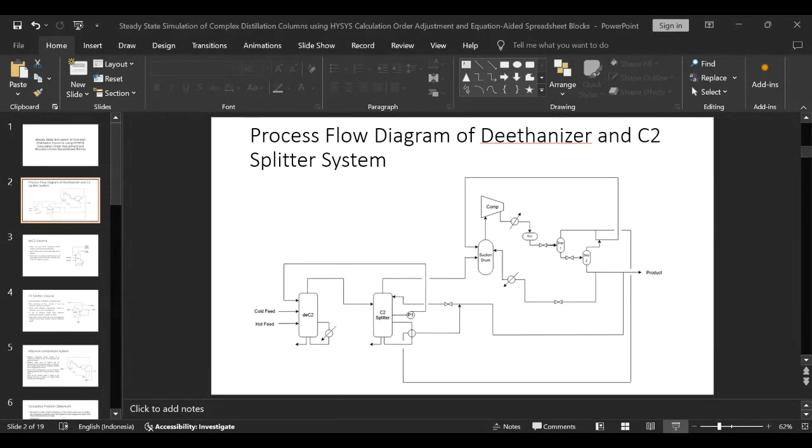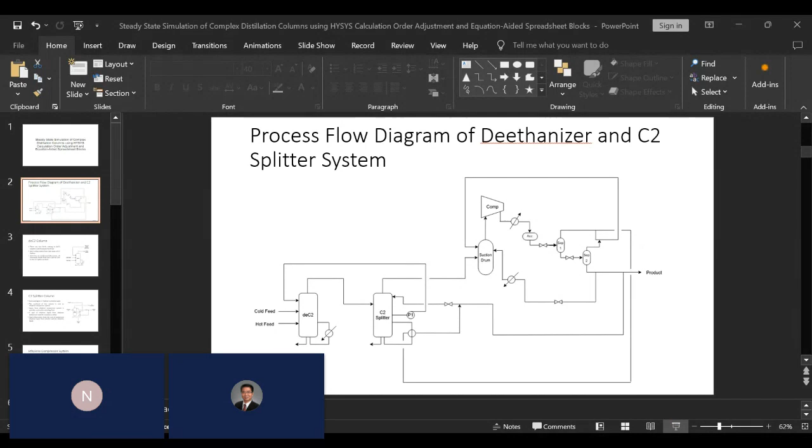Sorry, Novian, I'm not sure whether you're sharing. I can see only the title slide still. Okay, now I can see. Then you can put it full screen, I think it's better. Okay, perfect. Wait, if I move to the next slide, can you see any difference? I see the process flow diagram now. And how about now? Still the same. Maybe you're projecting? Now I can see the column, the deethanizer column.

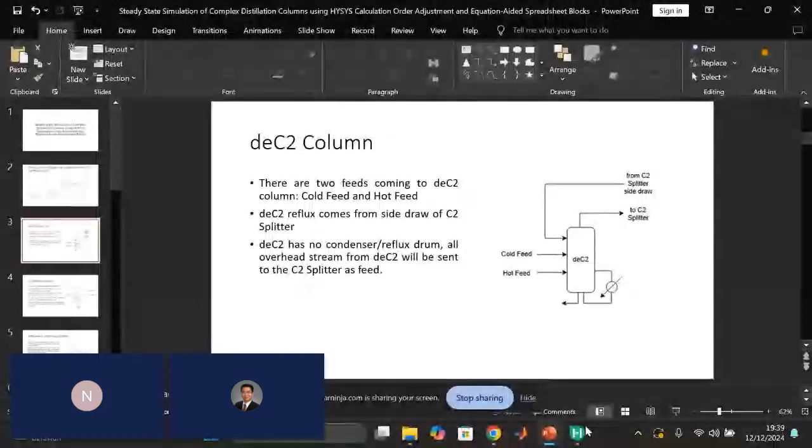Okay. Right. So maybe I will share an entire screen. I think it's a lot safer. Okay, how about now? Yes. Yeah, this is perfect. Okay.

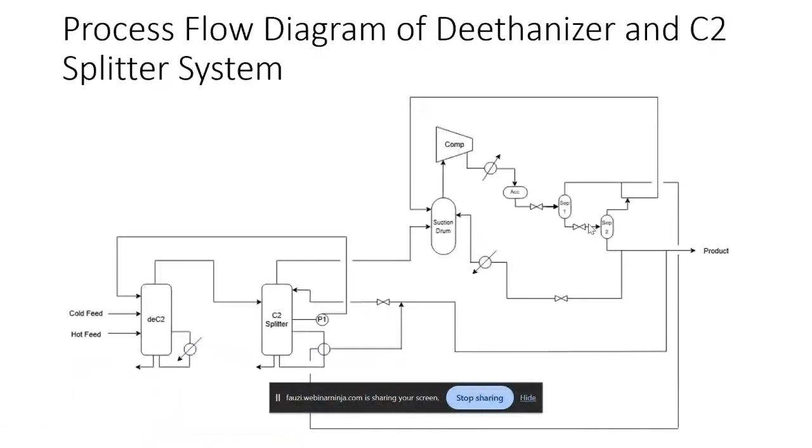So for the ethylene refrigeration system, we have the usual stuff that we might have in a refrigeration system. So we have suction drum, compressor, and then the condenser, accumulator to store the condensed liquid, and then we have multiple expansion valves to gain lower temperature. And I will describe each of the equipment in greater detail using next slides.

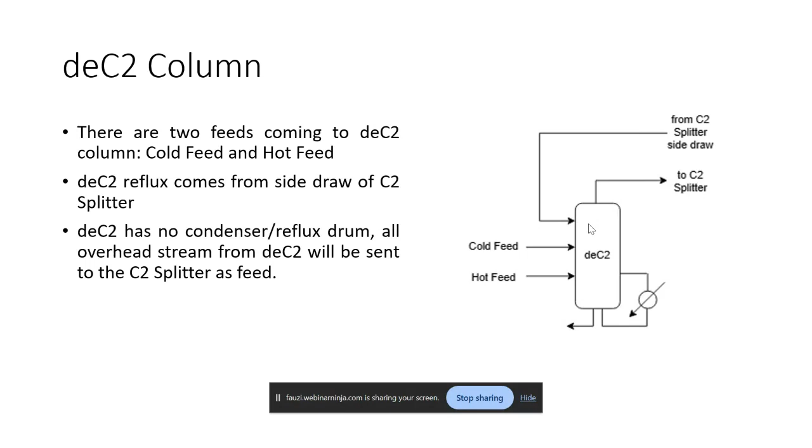So we have the deethanizer column. For this column, we have two feeds coming in: cold feed and hot feed. And the name really suggests the temperature, so cold feed has lower temperature than hot feed. For the reflux, the deethanizer reflux comes from the side draw of the C2 splitter. Because of this, the deethanizer has no condenser or reflux drum. All of the overhead stream from the deethanizer will be sent to the C2 splitter as feed.

And then we have the C2 splitter column. Feed coming to this column is entirely vapor because it's basically the overhead of the deethanizer. And the overhead of this column is sent to the ethylene compressor system. So when the overhead is finished being separated in the C2 splitter, it will be directly sent to the compressor. And vapor from the ethylene compressor system is partially used as the reboiling fluid.

Now, this is one of my favorite parts of this system because it has very nice heat integration; nothing goes to waste. The ethylene vapor that still contains transferable heat is used as a reboiling fluid for the C2 splitter, so it doesn't rely on external heat supply such as steam. And a part of the ethylene liquid from the ethylene compressor system is used as reflux. This stream will be joined together with condensed ethylene from the reboiler, and together they become the true reflux for the C2 splitter.

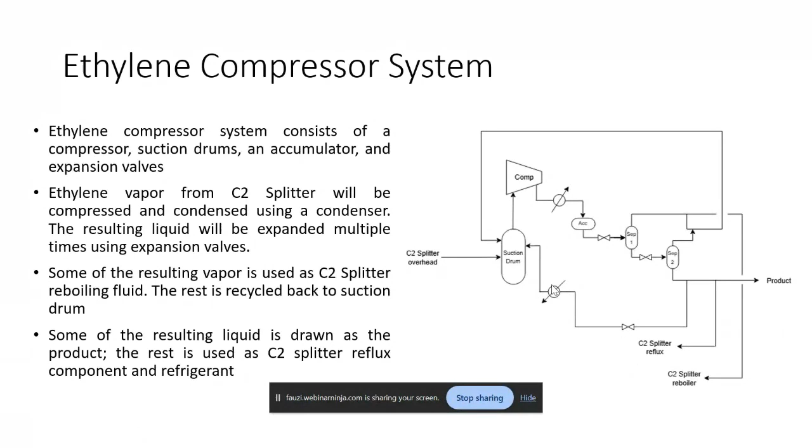Novian, can you? Yes. Sorry to interrupt. Can you click hide on the black box? Oh, yeah. Okay. Sorry. Yeah, thank you.

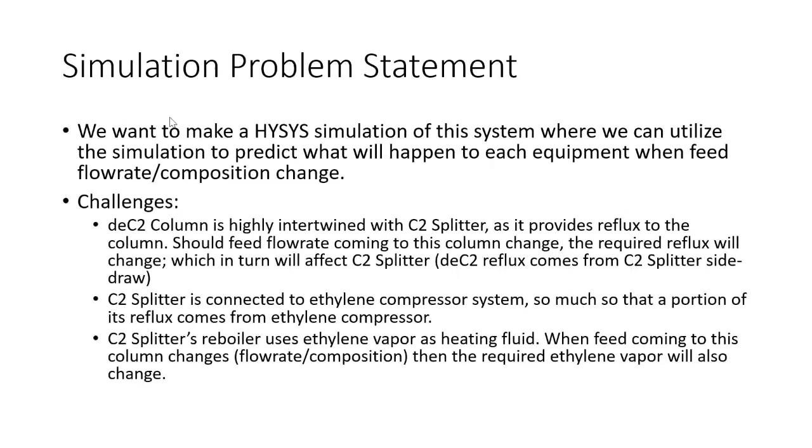Okay. So we want to make a HYSYS simulation of the system where we can utilize the simulation to predict what will happen to each equipment when feed flow rate or composition change. I think this is a very obvious thing that we want to achieve, because if you make any simulation using whatever software you choose, it's not really useful if the simulation is static, in the sense that if you change composition or flow rate, it will simply be destroyed, or maybe it doesn't converge or doesn't solve.

It's not going to be useful, because in a real plant you already have data called heat and material balance, so you don't have to make a computer simulation to know the value of any streams, because it's already calculated by the licensor. So to make your simulation useful, you have to allow some degree of freedom, such as a change in flow rate, change in composition.

Now, to make this objective come through, we have challenges, right? Because basically, if you want to have something in life, there will always be challenges that we have to overcome, and this one is no different. So we have several challenges, and challenge number one is that the deethanizer column, or the deC2 column, is highly intertwined with the C2 splitter, because it provides reflux to the column. Right? C2 splitter provides reflux to the deethanizer.

So if the feed flow rate coming to the deethanizer column changes, the required reflux will also change, which in turn will affect the C2 splitter, because the reflux for the deethanizer comes from the C2 splitter. Challenge number two, the C2 splitter is connected to the ethylene compressor system in a way that a portion of its reflux comes from the ethylene compressor. So anything that happens to the C2 splitter will affect the ethylene compressor system as well. Will affect your product. Will affect the amount of ethylene vapor that will be withdrawn from the system to provide the reboiling duty.

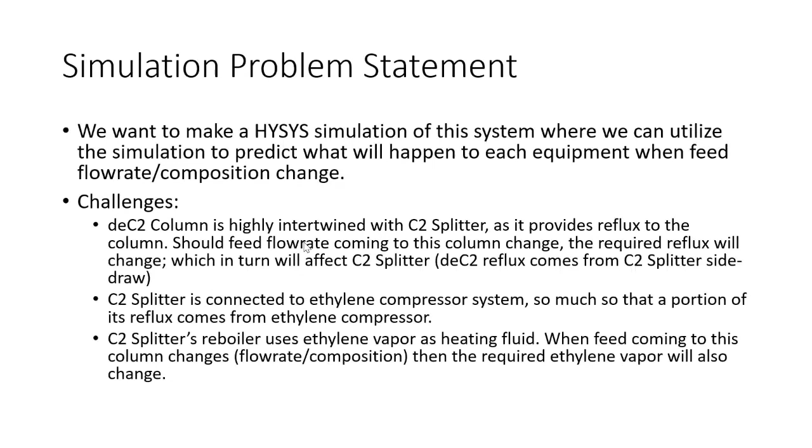Yeah, this is challenge number 3 actually. So the C2 splitter's reboiler uses ethylene vapor as heating fluid. So when the feed coming to this column changes, like the flow rate or composition, then the required ethylene vapor will also change. Now, technically, we also have another challenge, but it's not necessary to mention everything, but it all can be summarized into this sentence. So, which one comes first, the chicken or the egg?

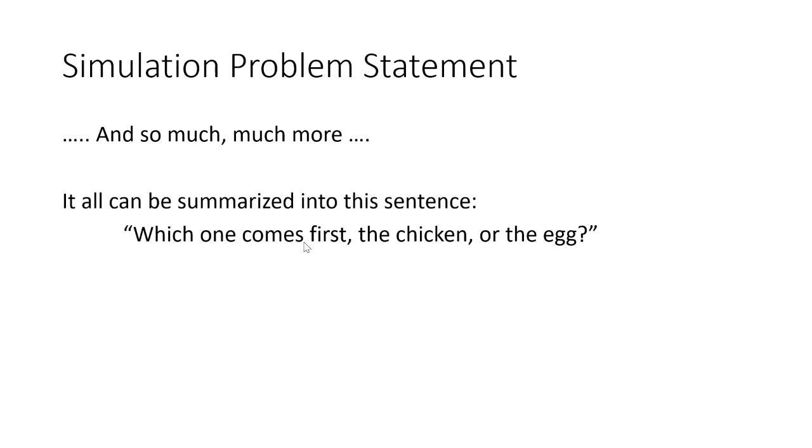Because the nature of this system is that everything is connected. So if you change the behavior of one column, it will change the next column, and it will change the ethylene refrigeration system. If you change the ethylene refrigeration system, it will change the C2 splitter, and it will also change the deethanizer. So it's like an age-old question: the chicken or the egg? So which one comes first?

Now, let's strategize, right? So if you have some kind of problem that seems to be unsolvable, at least at first, it's always a good idea to take a step back and strategize. Now, we'll divide the system into multiple subsystems and connect them all using recycle blocks. And then strategy number 2, use spreadsheets to adjust the required flow rate of critical streams, especially reflux streams, because when it comes to simulation, we have to clearly define the flow rate of reflux, because when you already have feed and then you define the cut point temperature, reflux is all that you need. And of course, when it comes to composition, we can let the recycle operation do the job.

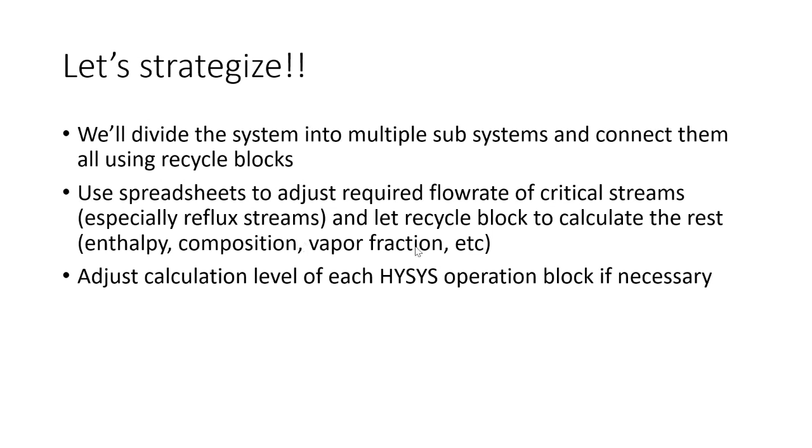And then strategy number 3, we can adjust the calculation level of each HYSYS operation block if necessary. Now, before we truly begin discussing the technical stuff, I think it's better to have a brief introduction of the operations that we'll be using. So this one is a brief introduction of the recycle block. So what is a recycle operation? Basically, it is a mathematical or logical unit operation.

So when we want to make a recycle operation, basically you will make a tear stream, right? So when you encounter a stream that will simply loop from one point to the next, and then it will return to that previous point, you will require a recycle block, right? It is required when downstream material streams mix with upstream material streams. And when we're talking about recycle operation, basically you have two streams, especially when you tear the stream apart. You have the calculated stream and then you have the assumed stream.

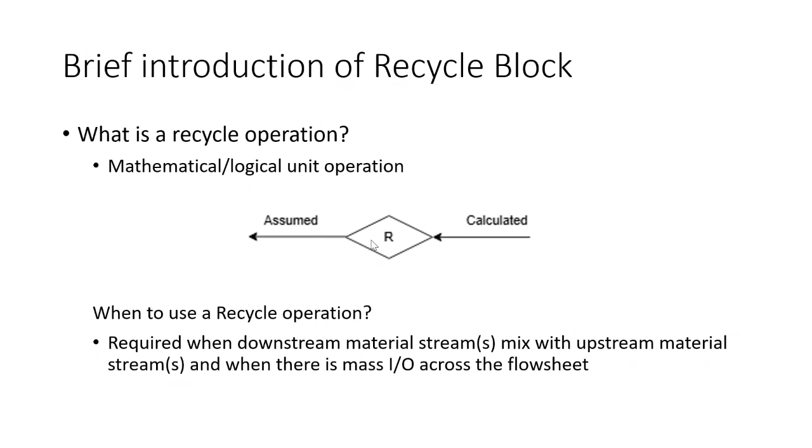The recycle block, well, it's not about combining the two streams. It's like comparing the value of each stream, the calculated and the assumed, and the recycle block will simply do iterative calculation to make sure that the value of the calculated stream and the assumed stream become very similar. It depends on the sensitivity level that we define actually.

Now, how to add a recycle operation? Basically, we can estimate the recycle stream. For the purpose of this webinar, we can call it the dummy stream, right? And then we can solve the flow sheet up to the calculated stream.

So in this case, we have this feed, right? It's being combined with the dummy stream, and then it will enter this separation equipment. So the bottom stream is the calculated stream, and the overhead is also a calculated stream. But the bottom stream in the calculated one will be connected to the dummy stream, which is the initial estimation of the recycle stream, and it will be connected with the recycle block.

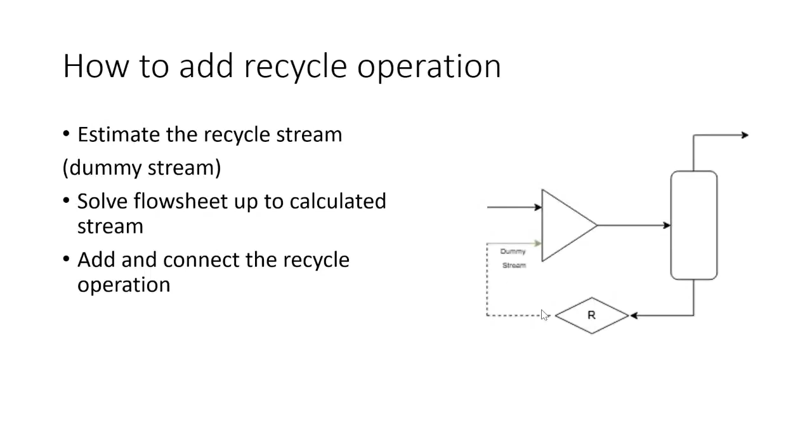Initially, the estimation can be very different from the calculated one. So it's the purpose of the recycle operation to simply compare the two values and make the two values the same, or converge.

Now it's about divide and conquer actually. So using recycle operations and dummy streams, we can divide the whole system, the deethanizer, C2 splitter and ethylene compressor system, into three distinct subsystems, right? So we have the deethanizer column, C2 splitter column, and ethylene compressor system.

Each subsystem will be made self-sufficient in a sense that it will be able to converge by itself. For instance, the deethanizer doesn't require a stream from the C2 splitter, at least initially, because we will provide a dummy recycle, or dummy reflux really. So the same thing will happen for the C2 splitter system, and then also the ethylene compressor system.

And when we make the three subsystems self-sufficient, self-reliant, we can connect each connecting material stream with recycle blocks. So they will just transfer data from one point to another point until everything converges.

Now, we'll be talking about spreadsheet operations. The spreadsheet operation will be used to manipulate or perform calculations using user-defined and/or flowsheet variables. So using spreadsheet operations, we can write mathematical and logical expressions using typical spreadsheet calculation syntax. So basically, it's multiplication sign, addition sign, division sign, basic mathematics actually.

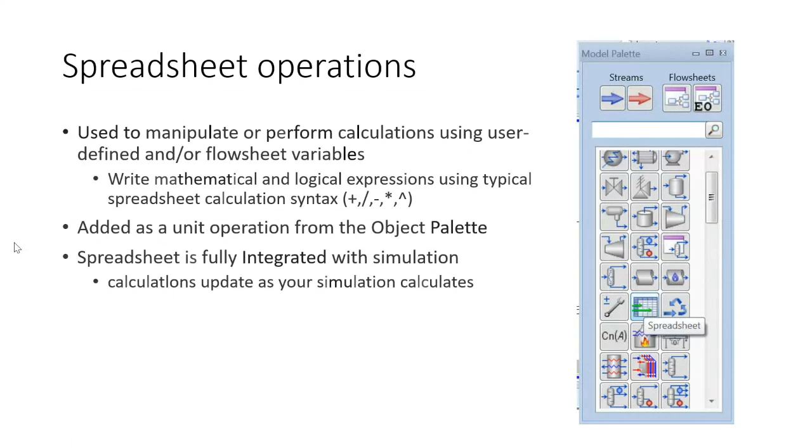Now, so what about the spreadsheet potential? It's my personal taste when I want to solve something that requires very hard logical thinking skills. Sometimes I think it would be great, especially in this situation, if we could store some simple algebraic equations in a spreadsheet to calculate the required reflux every time the feed flow rate changes. And then we can export the calculated value to dummy recycle streams, right?

Because if we're talking about distillation columns, that's the thing that we have to provide the initial guess for, right? Because you already have the feed, and you already have the number of stages or trays. You already have the set point for cut point temperature. So all you need to do is define the reflux, and then hopefully all columns will be forced to converge in a flash, or near flash, depending on how the system changes. Now, wouldn't it be great, right?

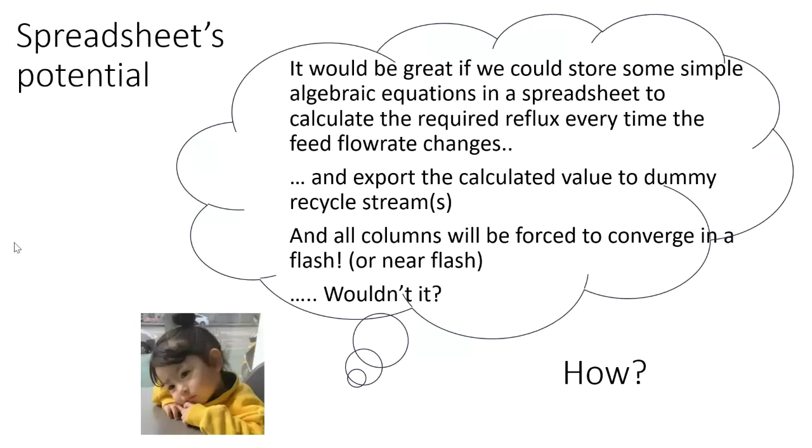But the thing is, how can we achieve that dream? Because if we cannot make plans and execute the plans accordingly, then the dream will become a pipe dream. It simply will not happen. So to make such a plan, I think it's always beneficial to go back to the basics. In this case, we can talk about the basics of the distillation column.

So when it comes to the distillation column, we have multiple streams, right? So we have distillate, abbreviated as D, reflux as L, overhead vapor as V, and then reflux ratio, L divided by D, feed as F, bottom product as B, and then component recovery.

Component recovery is something that I believe every designer of a distillation column must define in the beginning, because it's not entirely helpful to just say, oh, I want some heavy component in the bottom stream to have a concentration of 0.9. But if the recovery of this component is low, then it's not necessarily useful to have such good quality bottom product, right? Because most of the heavy component is simply wasted in the overhead product, which is going to be a waste, or maybe very detrimental for your next process.

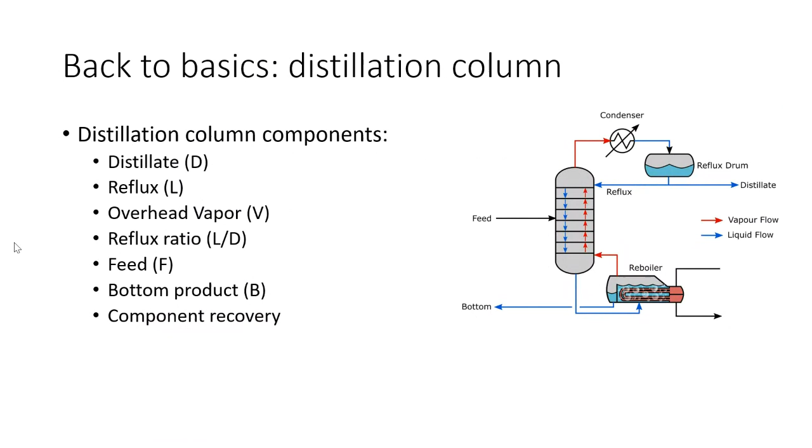Now, we'll be talking about simple mass balance. When we are constructing mass balance, it's always useful if we clearly define the control volume of our analysis, right? When we want to do mass balance, we have to define the control volume. So for the first case, we want to do a simple mass balance around the condenser.

So basically, if you express all variables in mass flow rate, you can say that the vapor of the column, V, equals L plus D, which is reflux and distillate. And then you can define R, or reflux ratio, as L divided by D, which is, well, very common actually.

Now, if we define the control volume to be bigger, right? It's not about the condenser anymore, but we simply enlarge the scope of the control volume to encompass the whole distillation column. We can say that feed will be equal to the addition of bottom product, or B, and distillate, or D.

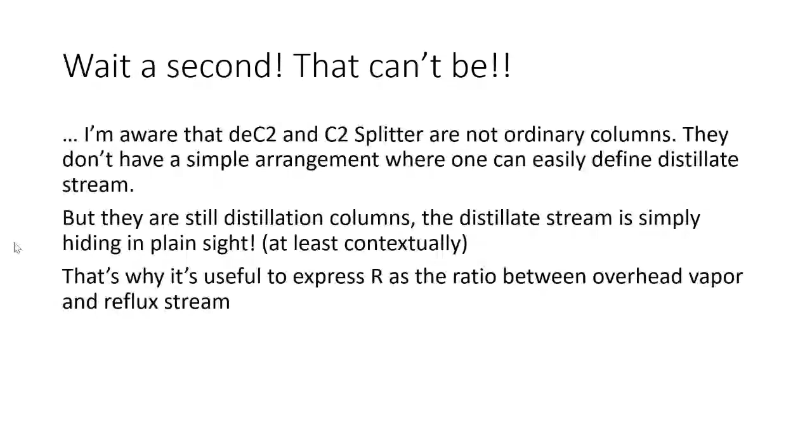So that's why I think for this kind of column arrangement, it is useful to express R as the ratio between overhead vapor and reflux stream. And this is going to be very important for the method that I'll be showing to you to solve the whole system.

Now, I have mentioned that in order to make the system adaptable to flow rate change or composition change, we have to be able to adaptively define what the reflux is, right? So we'll discuss how to do a reflux calculation by using this simple flowchart.

So the first step is that we need to define a heavy component which will be present in the bottom stream. It doesn't matter what kind of heavy component you choose. What's important is that the heavy component must always be present in the bottom stream. So when you adjust the reflux ratio or the composition in the feed, make sure that the heavy component you choose will always be in the bottom product in an appreciable amount.

And the next step is we have to define the recovery factor of the heavy component and its concentration in the bottom stream. And I have to stress that the numbers we're going to define, the recovery factor and the concentration, will act as an estimation. So if you have some kind of drastic change in composition, then the recovery factor and concentration in the bottom stream are, of course, going to change. But as long as the reflux is enough, the column will converge.

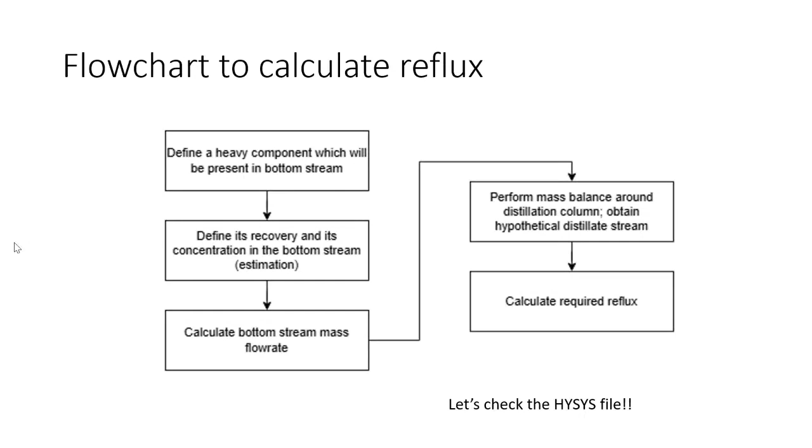And then the fourth step is that we perform mass balance around distillation column to obtain hypothetical distillate stream. And then the last step is we will calculate the required reflux. In order to show you how it's going to be, now let's open the HYSYS file.

Okay, so can everyone see the HYSYS? Yes, I can see. Oh yeah, okay. All right.

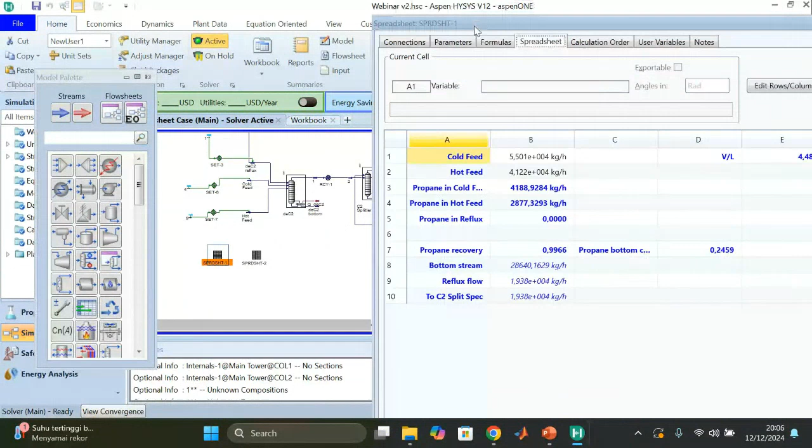So basically, let's see the reflux calculation for the deethanizer. I stored it in spreadsheet 1 actually. So let's make the window bigger. Right. Now I have multiple cells, right? I have cold feed, hot feed, and then propane in cold feed, propane in hot feed, and so on.

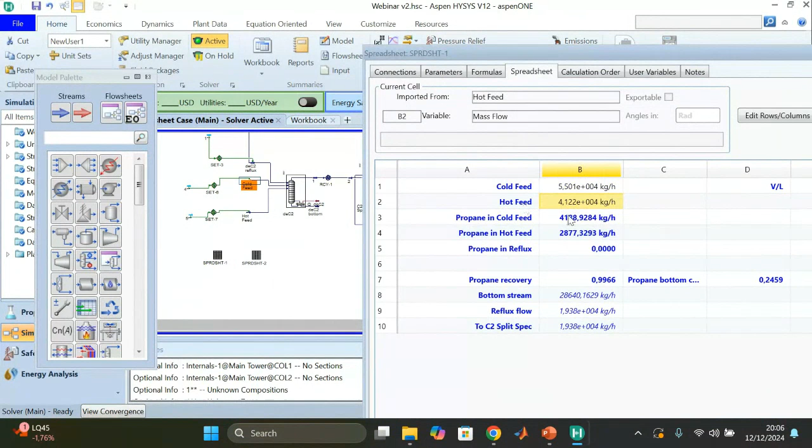Now it's clear that for this option, I've chosen propane as the heavy component of my choice. And then for the cold feed, I simply import the mass flow from the stream cold feed itself, and for hot feed stream, I import it from the stream. And then for the heavy component, the step is the same actually. I simply import it from cold feed and hot feed. And because the value of each variable is simply imported from the stream itself, this value will always be updated.

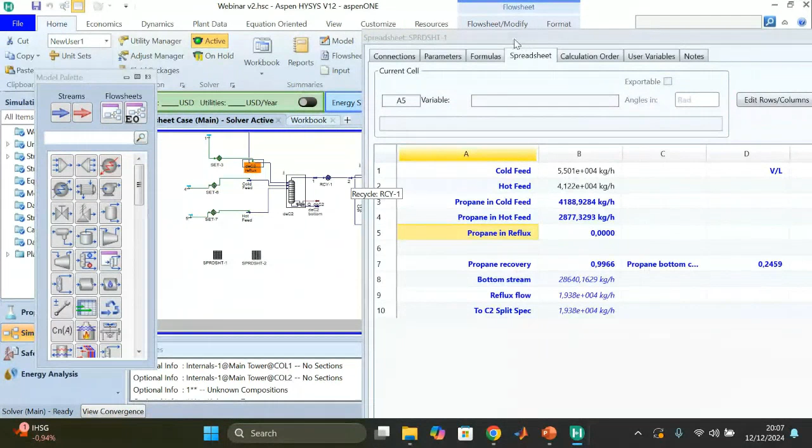And this is not entirely important actually, but I like to show it anyway because the target is there is no propane in the reflux stream. Sorry, there will be no propane in the reflux. Now I will define that the propane recovery is going to be 0.9966, so it's about 99.66%. And then the V/L ratio is going to be 4.487.

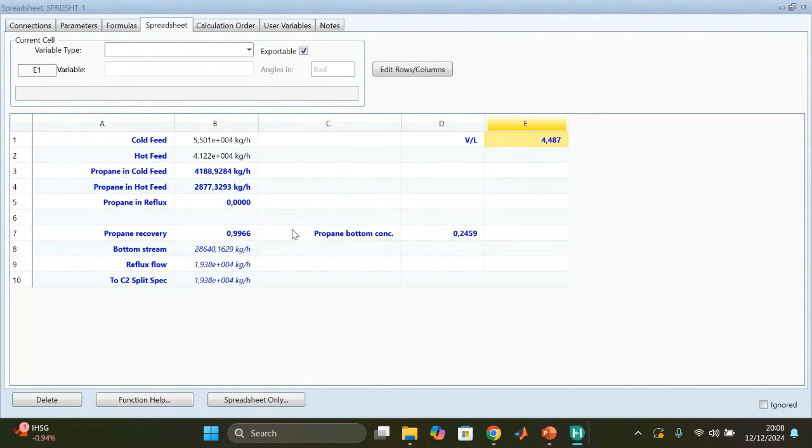Now the propane bottom concentration, or the concentration of propane in the bottom stream, I will set the target to be 0.2459. So with all this data, we can calculate the bottom stream. So let's see the formula. Basically, it's the addition of cell B3, propane in cold feed, and then B4, propane in hot feed, and then B5, but this is not necessary actually. And then the addition result will be multiplied by cell B7 or propane recovery.

So what this equation is saying is basically that I have imported the data of heavy component of my choosing, that is propane, in the feed, and then I will multiply it with propane recovery. So I will have the amount of propane that will be recovered in the bottom stream. Now I will divide everything by D7 or propane bottom concentration. If I do not divide it by this value, this formula will simply just calculate the amount of propane in the bottom stream, but not the bottom stream itself. That's why I need to divide it with the predefined propane bottom concentration.

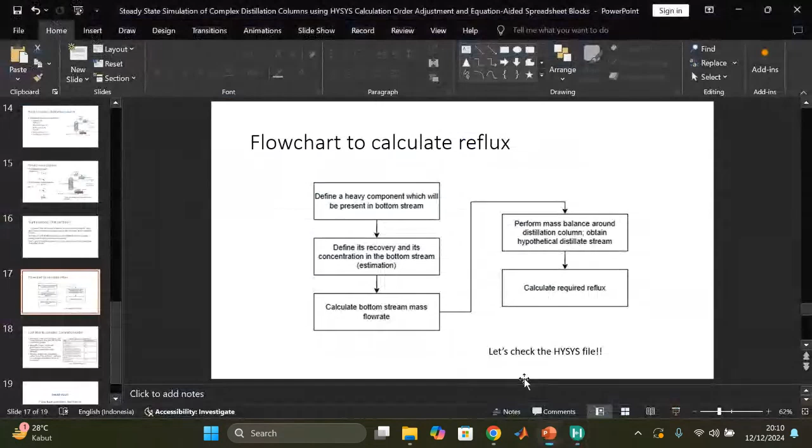And now we have the bottom stream, right? We'll move to how to calculate the reflux flow. Basically, it's just like the mass balance equation that I showed you before. So to know the L or reflux, we simply have to calculate D or distillate first. But just like what we saw earlier in the PFD, we don't have the clearly defined distillate stream of the column. So basically, this is just a hypothetical distillate, if I may. And then once the D is calculated, we can divide it by R minus 1.

So we'll move again to the spreadsheet. Basically, we have B1 plus B2. So this is the total feed coming to the column, and then it's subtracted by B8, the bottom stream, right? So the result of B1 plus B2 minus B8 basically is the hypothetical distillate that we are looking for. And then the result of this mathematical operation will be divided by cell E1 minus 1. That's why we can have reflux flow.

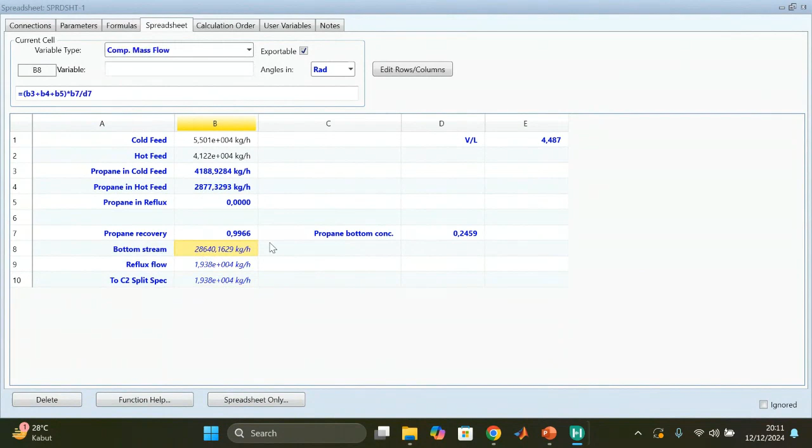Now, for this cell, we'll talk about later. We'll move to see how we can calculate the reflux for C3 splitter. Okay, let's see spreadsheet 2. So the logic is basically the same. So I have cell deethanizer feed, and then ethane in feed. Oh, sorry, I mistyped the name. It's supposed to be C3 splitter feed.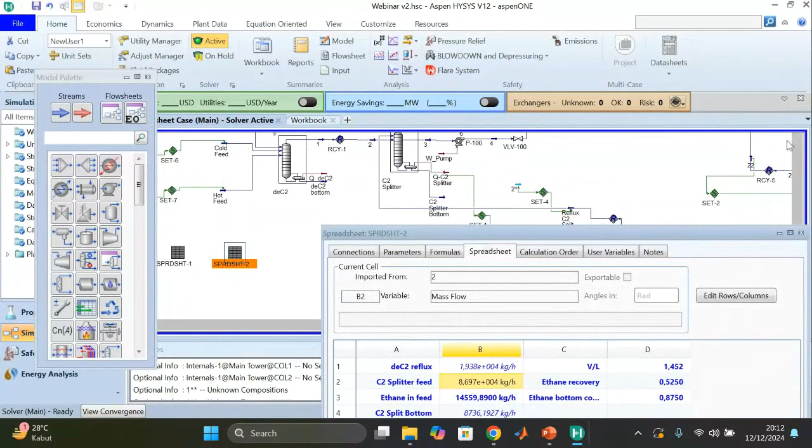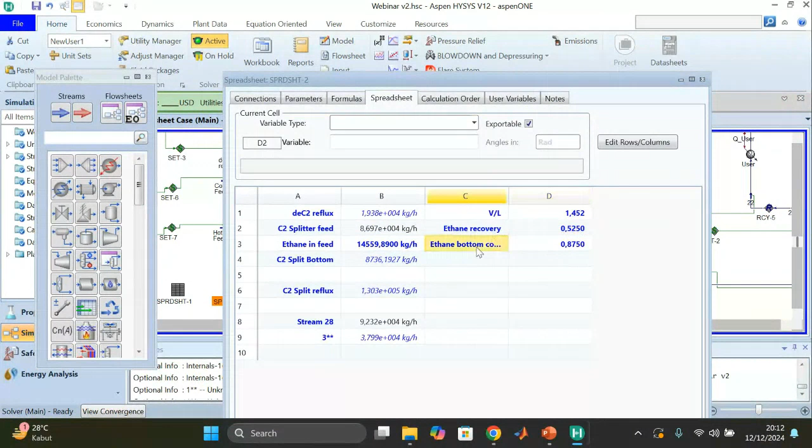Okay, I have the feed coming to C2 splitter, right? Because I imported from stream number 2, and we can see in the HYSYS file that stream number 2 is basically the feed coming to C2 splitter. And then I also choose ethane as the heavy component. Now, I also define the ethane recovery as this value, ethane bottom concentration as 0.875, and then VL ratio, this value.

Then we'll see about how to calculate C2 splitter bottom. So basically, it's the same. We simply multiply the ethane in feed times ethane recovery. So we have the total ethane recovered as bottom product, and then we'll divide it with cell D3, that is ethane bottom concentration, to know the total mass flow rate of C2 splitter bottom. Now, what about if we check the calculation, right? This is 8,736 kilogram per hour. What about this?

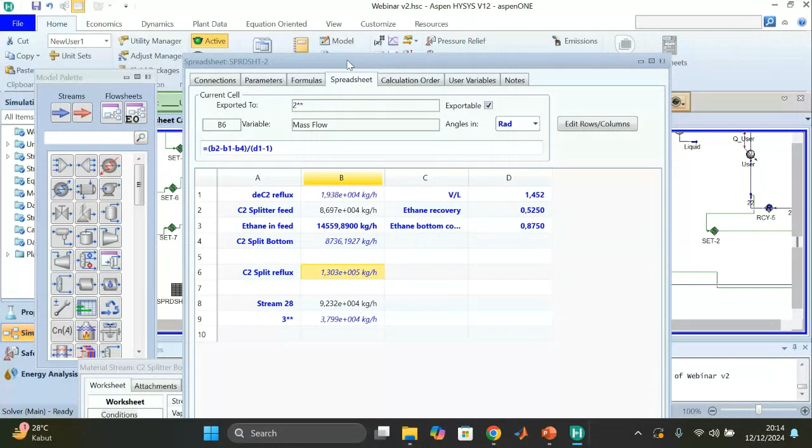Let's see. Yeah, there's some deviation actually, because I previously played a little to change the composition, so it's not entirely updated. But, just like what I said before, the VL ratio, the ethane recovery, and ethane bottom concentration, this is just a target. Just to know the C2 splitter reflux requirement. And as long as the C2 splitter reflux requirement is enough, then the columns will be able to be converged. And if you want to change the quality of bottom product or the distillate, just change this, the VL ratio.

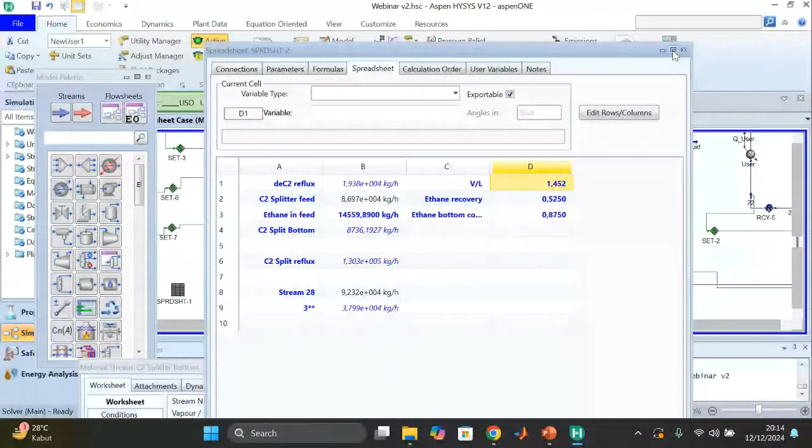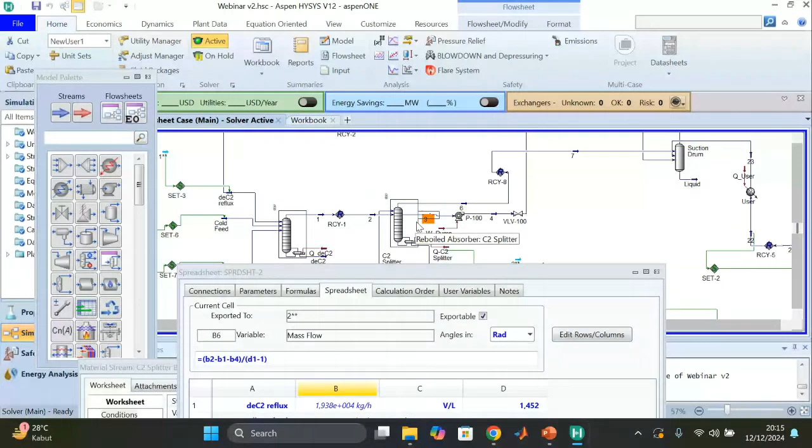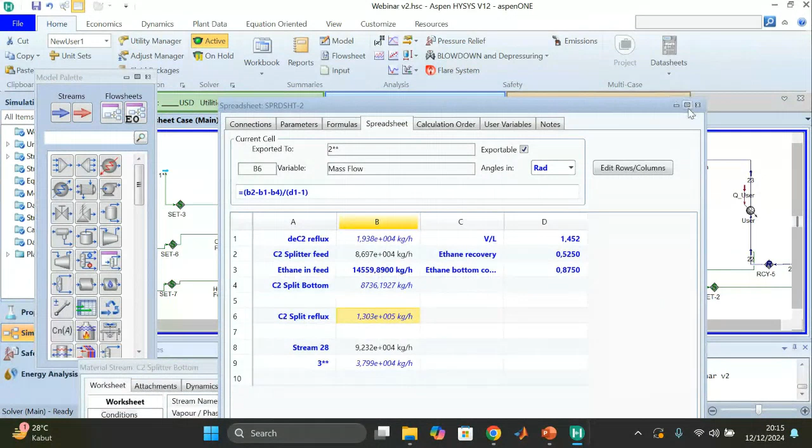Anyway, so we have C2 splitter bottom, and then we have C2 splitter reflux, and how to calculate this. So basically, it's about the same as the deethanizer, but the main difference is that in C2 splitter we have this material stream 3. This is a side draw from C2 splitter that will be recycled back as the deethanizer reflux. So if we perform a total mass balance around the C2 splitter, we will notice that basically this side draw will act as another outlet stream outgoing from C2 splitter. That's why the formula is a little bit different.

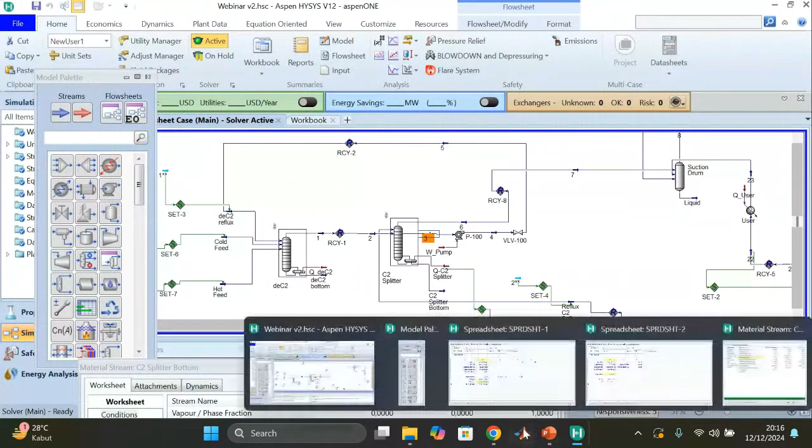It's P2 or C2 splitter feed minus P1, that is the reflux for the deethanizer, right? The side draw itself. And then it's minus B4, the C2 splitter bottom, and then it will be divided by D1 minus 1, or VL ratio minus 1. So besides this cell, the equation is basically the same as what we used before in the deethanizer column. Now for these two cells, stream 28 and cell 3 double star, I'll explain it later. Now we'll go back again to the presentation.

But column operations and subflowsheets, such as distillation columns, liquid extractors, refluxed absorbers, reboiled absorbers, etc., are going to be solved after material streams, energy streams, and ordinary unit operations are solved. And then the last priority is logical operations. So if you have logical operations such as adjust operations, recycles, and sets, they are all going to be solved last. Now, we can change the calculation order to suit our interest, of course. That is to make our simulation faster to converge.

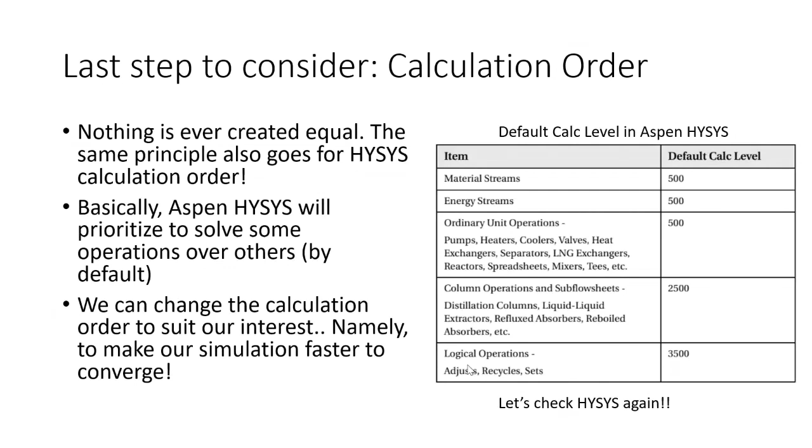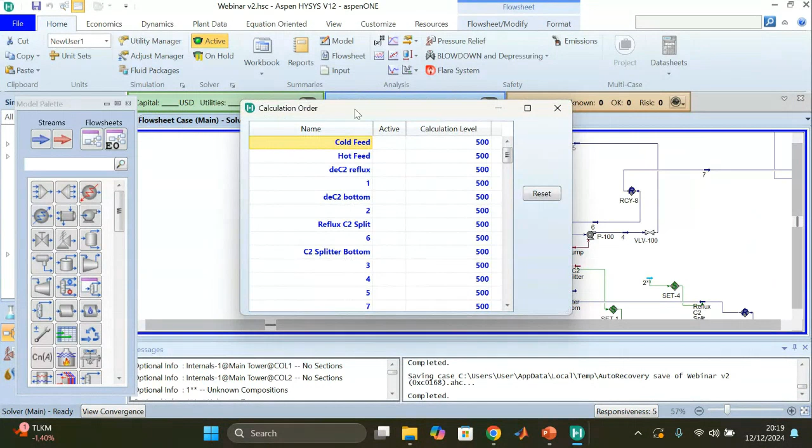Now, I will show you how to access the calculation level in Aspen HYSYS. So basically, to access the calculation level, you can go here in the solver tab. There is a small button. Just click it, and then you can have the calculation order window. So basically, you have the list of calculation levels that will be used to run this simulation.

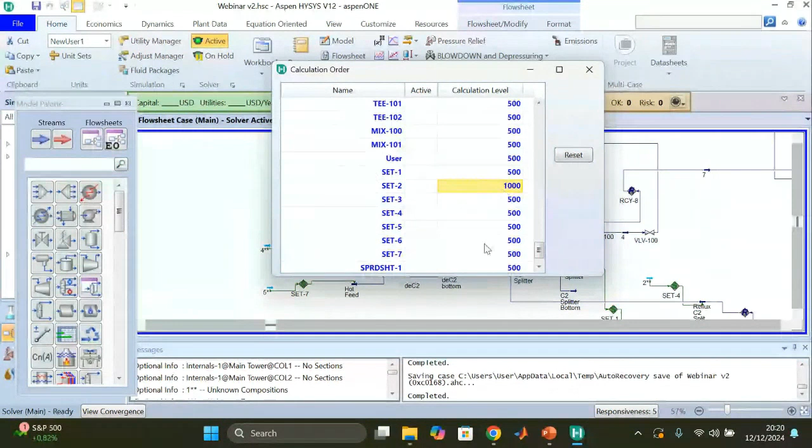And you can notice that recycle 3 is solved a lot faster than other recycle blocks, and recycle 4 will be solved last. Recycle 3 is going to be solved even at the same priority as material streams. And then we have set 2. Yes, set 2 operation is solved at a lower priority than other set blocks. So I will explain why I chose to put the calculation level this way.

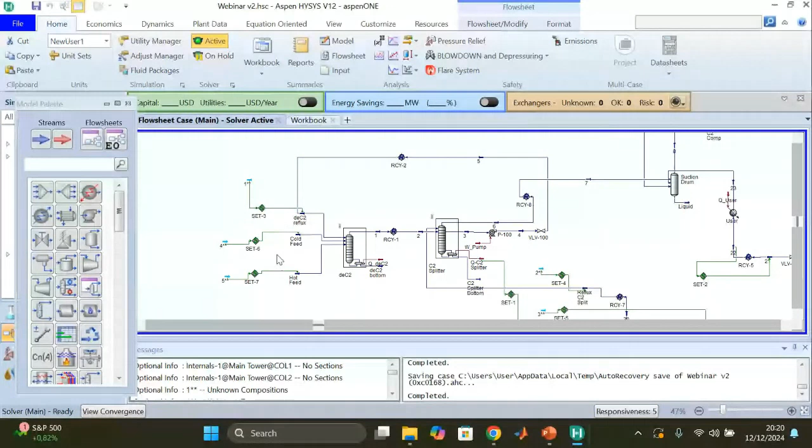So basically, the whole idea is to make this simulation as adaptable as possible. I want the simulation to handle the change in cold feed and hot feed, not only the flow rate but also the composition. But I also want to make this simulation able to handle the change in cooling duty that is represented by this stream Q user.

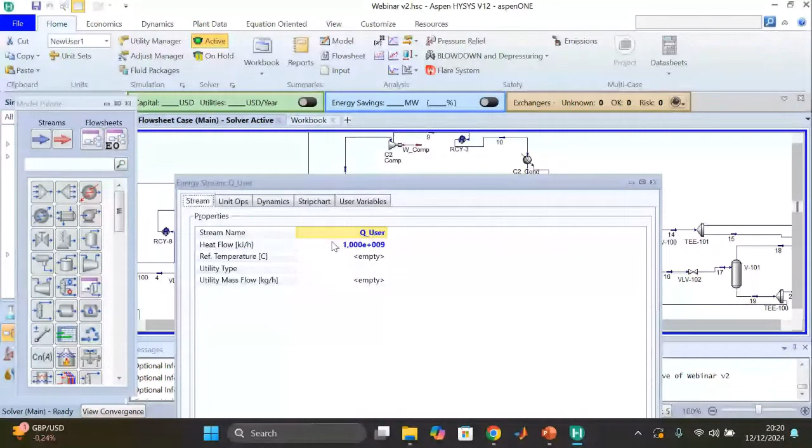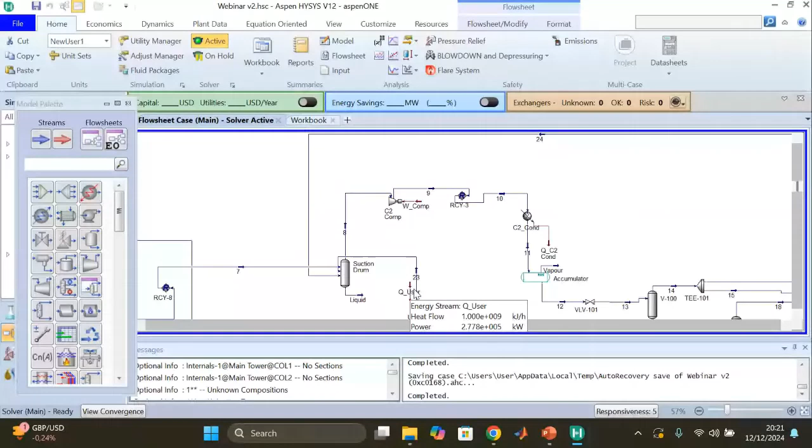Right, I can change this value to whatever I want. So why does recycle 3 need to be calculated a lot faster than others? Because if I want to make a change in this stream, then it will directly transfer the modified data right away from stream 9 to stream 10.

And if you see the whole ethylene refrigeration compressor system, stream 10 is basically like a linchpin of the whole refrigeration system, because it will provide the initial value for the condenser, right? That's why if I want to make an adjustment here, or maybe an adjustment in the feed flow rate, then I want the updated stream from stream 9 to be transferred directly, just as stream 9 is solved. That's why I want this recycle 3 to be at the same priority level as the material stream.

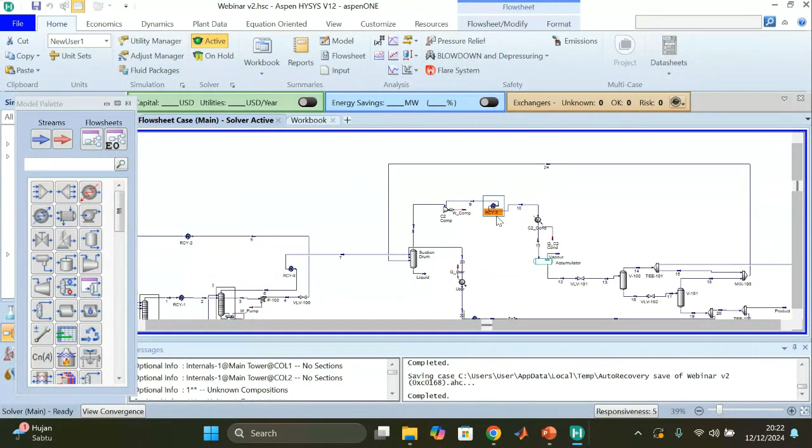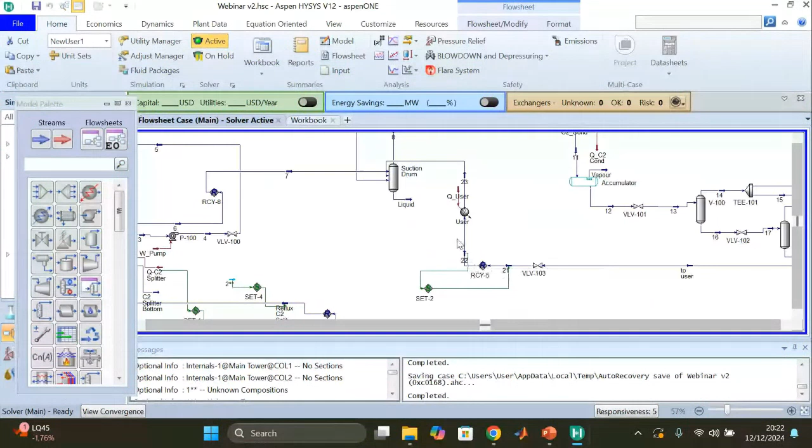Now for the set blocks, or set 2, I have an analogy for this. So basically, the stream coming to this user comes from the tee from stream 19, right? So if I change the value of Q user, it will require more flow rate from stream 19. So suppose I want to make the duty of the cooling twice as big. Of course, it will ask for more flow rate, right?

But if stream 19 has not been updated yet, how can it provide more flow rate to stream 22? I don't think it's going to be possible, or at least when it comes to HYSYS simulation, it will be prone to longer iteration times. That's why I want this set 2 to do its job at lower priority than stream 22. So after this is solved, it will transfer the updated requirement by stream 22 to stream 21.

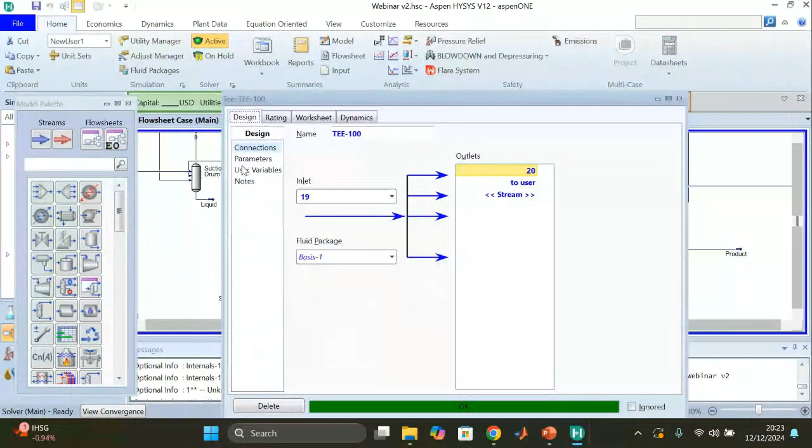And then stream 21 will transfer the required split spec of this tee block, right? Yeah. So as you can see, the flow ratio is basically not defined by me. It's all calculated.

Now, for recycle 4, this will be solved last. I'm not really sure why it's necessary to put it this way, because sometimes it's necessary and sometimes it's not; it all depends on how drastically I want to change the composition or the feed flow rate. But I think recycle 4 needs to be solved last compared to the other recycle blocks because it will act as the last step for the whole system to do the iterative calculation.

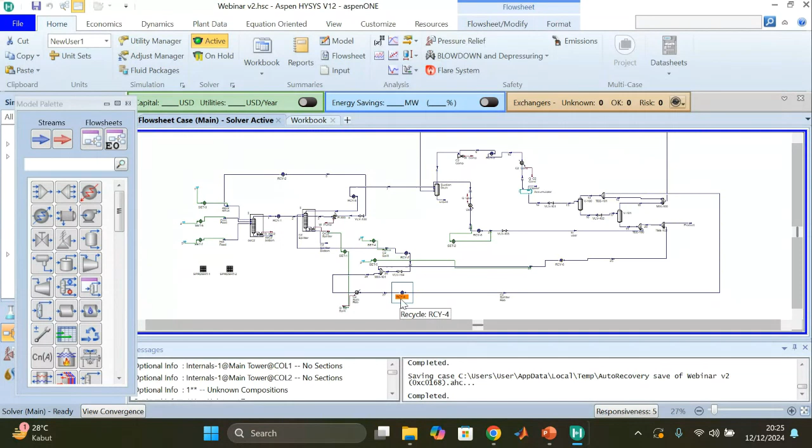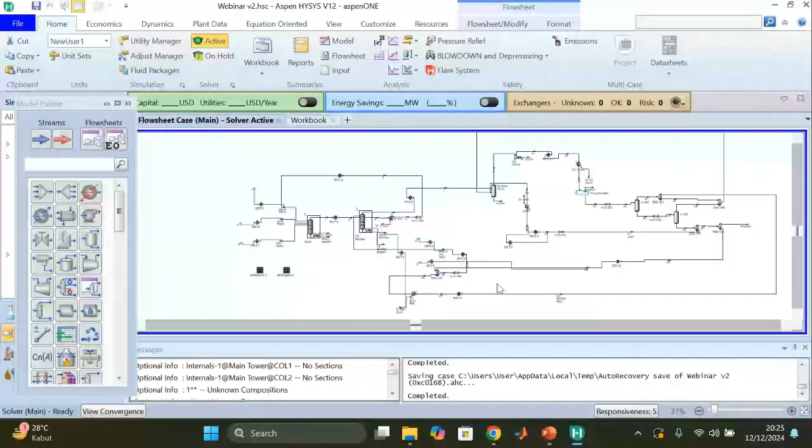So the logic is, if I order recycle 4 to do the job last, it will simply shorten the iterative calculation, because the stream before this recycle 4 will always be updated first, right? So I think it's going to shorten the iteration calculation.

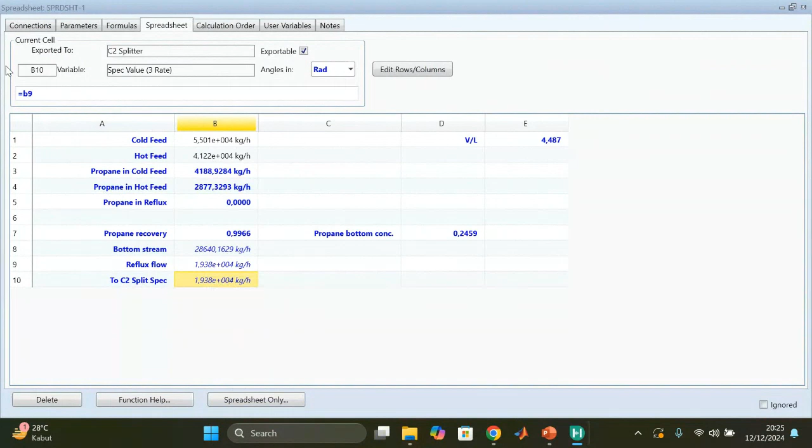Now, let's go back to spreadsheet 1. I haven't explained these two C2 splitter spec cells. So basically, the value of the stream comes from B9, right? As you can see in the equation, it simply recalls the value of cell B9, and then this value will be exported to the C2 splitter as the spec value.

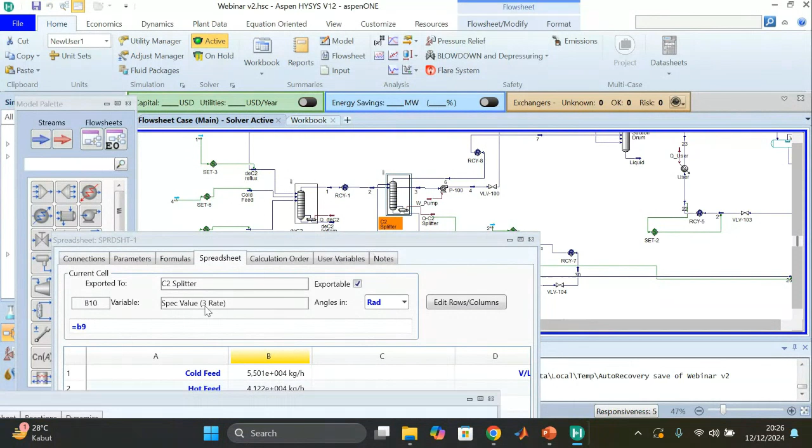So if you allow me to enter the C2 splitter, basically the mass flow rate of stream 3 I also use as a defining parameter that the C2 splitter column must achieve, right? So as you can see, the value of this mass flow rate is not defined by me.

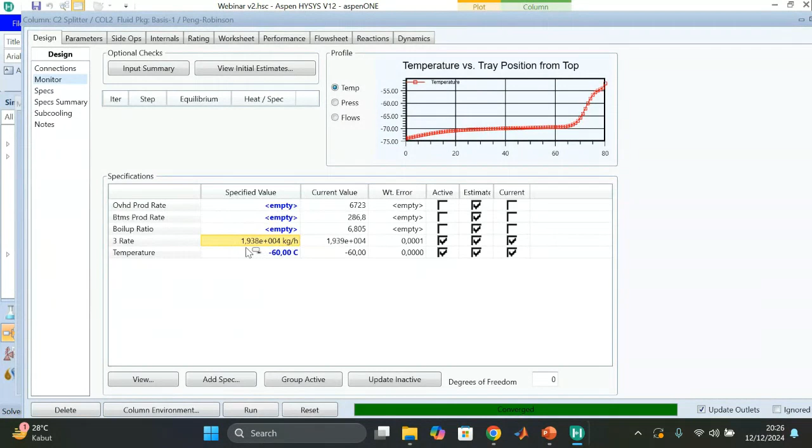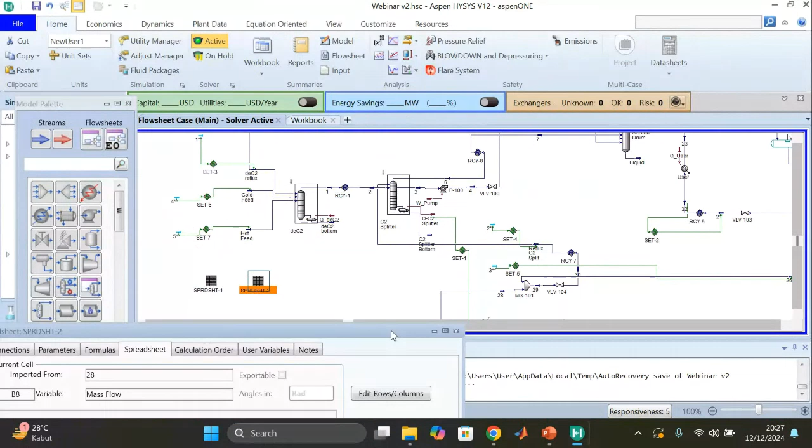And then for spreadsheet 2, we have stream 28 that we haven't discussed. Basically, stream 28 recalls the value from stream 28 itself. So it is from the downstream of the C2 splitter reboiler. As you recall, the C2 splitter reboiler uses ethylene vapor, and it will be condensed, right? And it will be combined with ethylene liquid to make reflux.

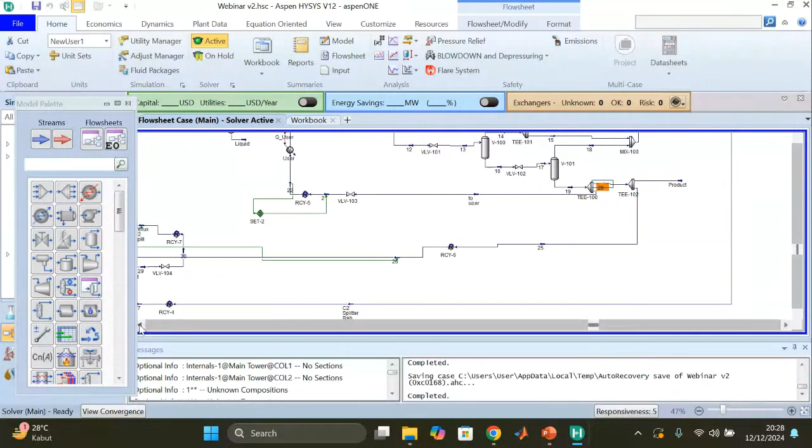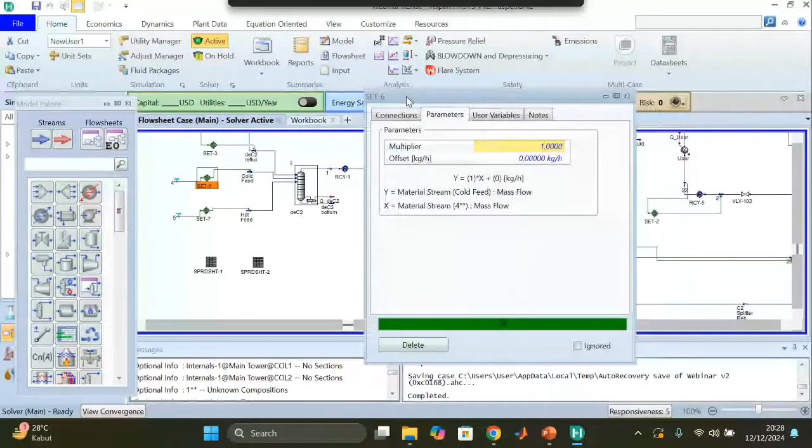So basically, this spreadsheet block will always define the required flow rate, and then the amount of ethylene liquid that must be taken from the ethylene compressor as additional reflux for the splitter. And how about if we see it in action? So we'll do some case study where the cold feed will be increased to 1.2, for instance. Right.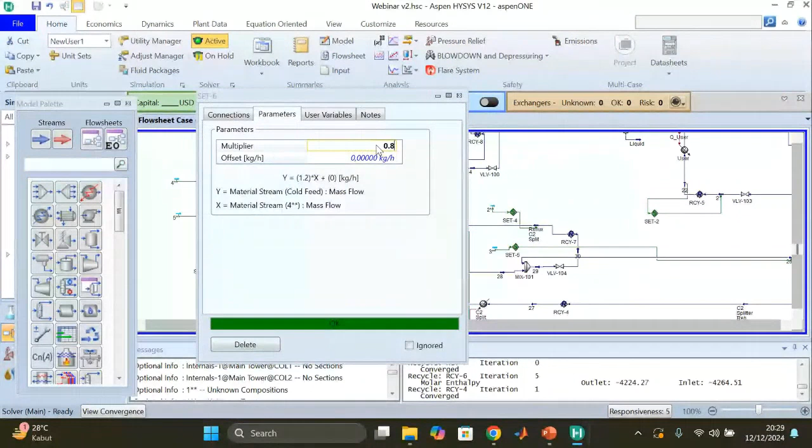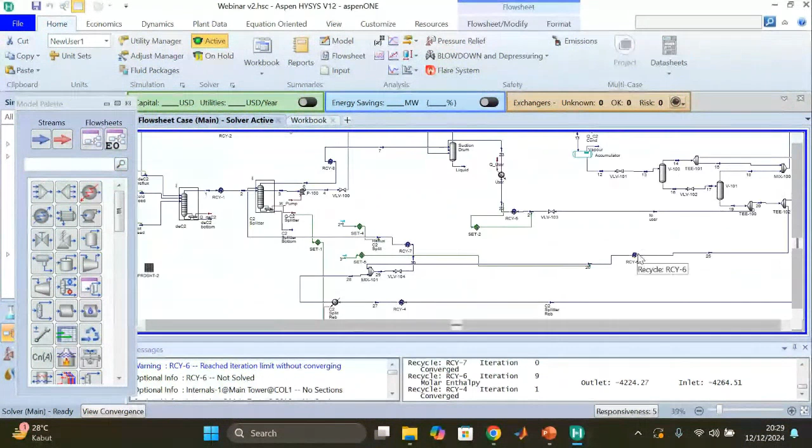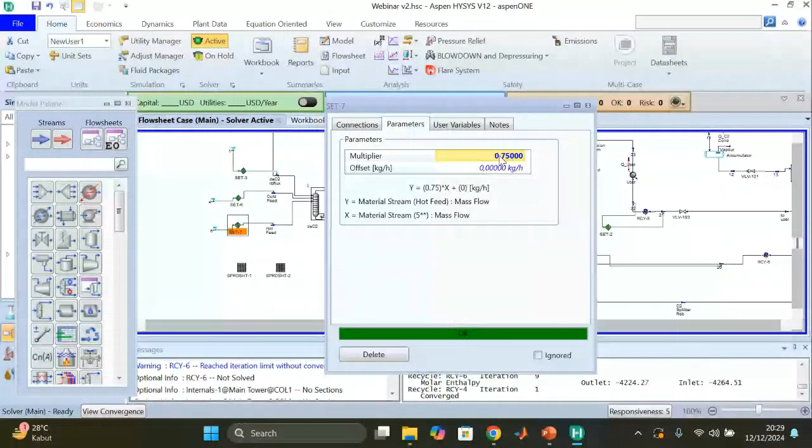But we can adjust it back to 1, also 1. And that is a demonstration about when we want to change the flow rate. But how about if we change the composition, right? So let's change it to mass fraction.

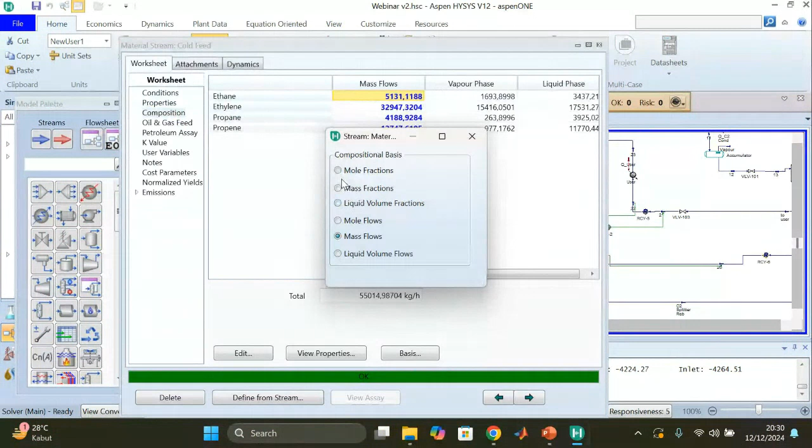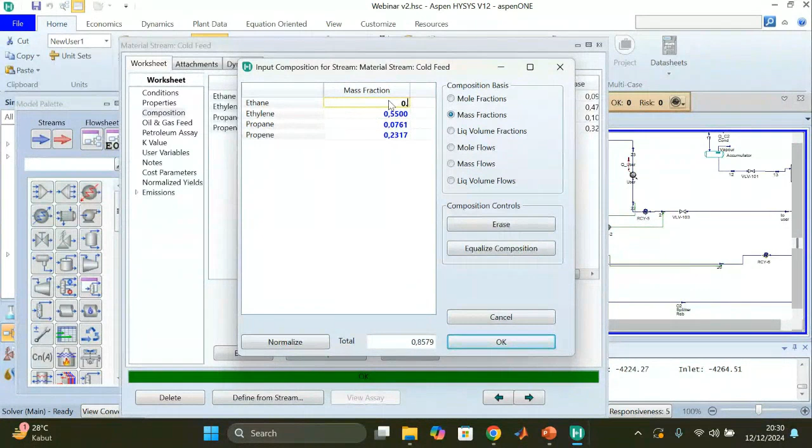Shall we say change the ethylene composition to 0.55, and then we'll increase ethane 499. Sorry, 0.0112. Wait, this is 0.155. 0. Let me adjust 1421. Right. Yes, and everything is also converged. So the system can handle at least some degree of flow rate change and also composition change.

So I think that the last demonstration concludes the webinar, actually. So I realized that I cannot present every step that I took when I made the HYSYS simulation.

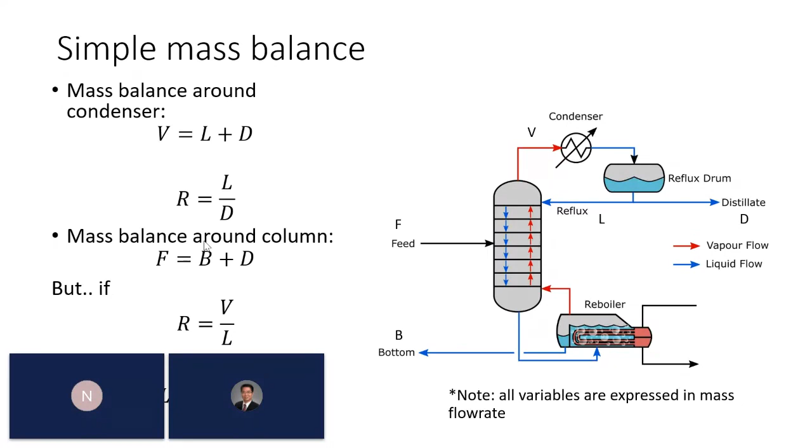And to know the distillate, all we have to do is know the bottom product. And to know the bottom product, all we have to do is define the target, the recovery factor, and then the heavy element concentration in the bottom stream, which is basically something that we will always define in the beginning. So the data will always be there. Okay.

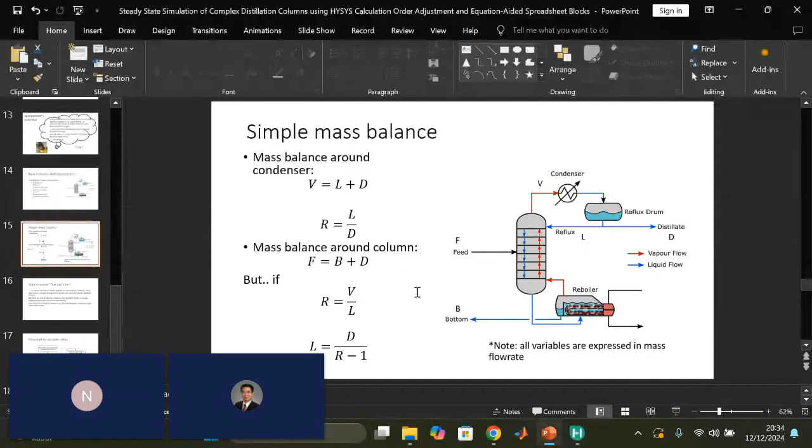To know the value of R itself, basically for this simulation I used a reference from another source, but I simply modified it in a way that doesn't inflict copyright infringement or something. But the logic is like this, actually. All right, thank you.

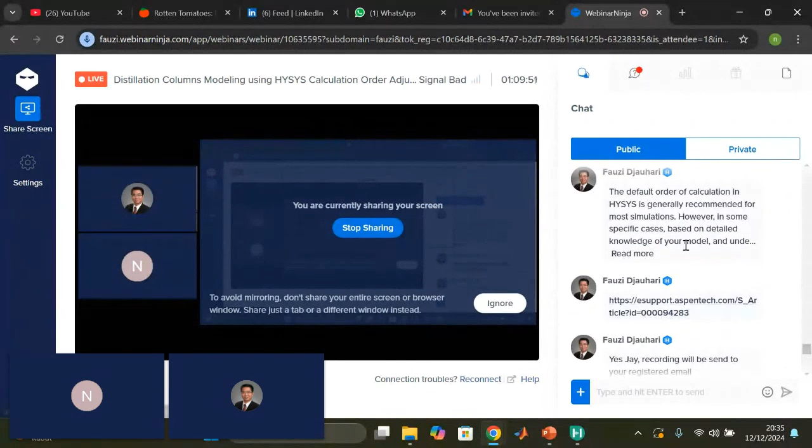I think there's some questions around the property package, but I guess that's already answered in the guide, actually. It depends, basically. Yeah. All right. Okay. I think that's about it. If there's no more, oh, there's one question.

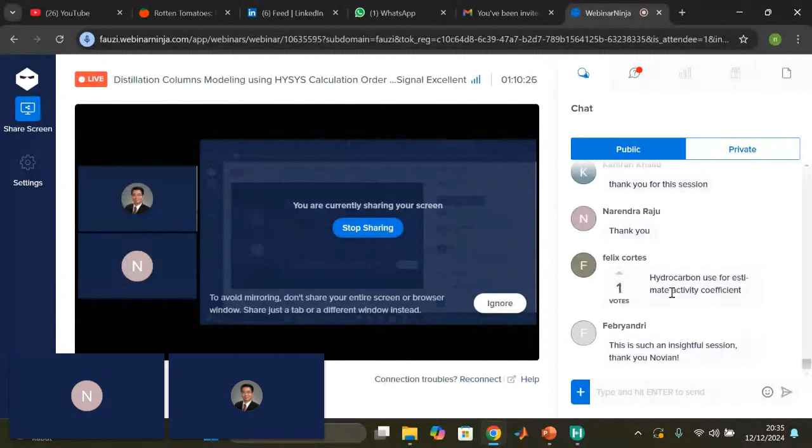Felix: hydrocarbon used for estimating activity? I'm not sure, Felix, I'm not really sure of the question in terms of the relation, actually. But for the activity coefficient, I think it's already included in the fluid package, right? Yeah. For the fluid package itself, I'm using Peng-Robinson. It's very common for hydrocarbon components.

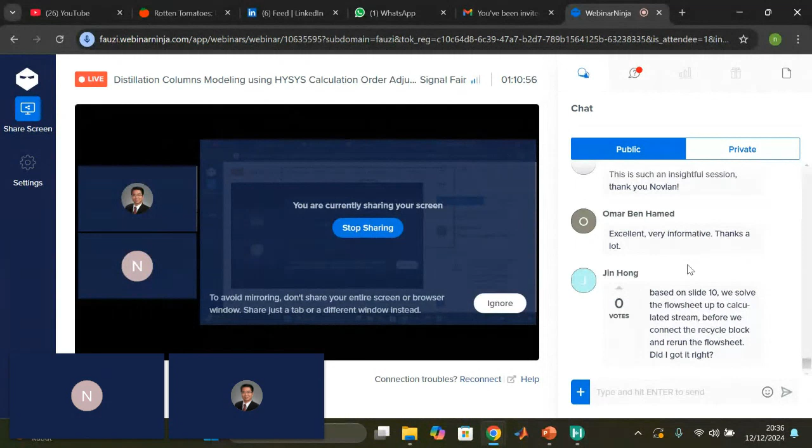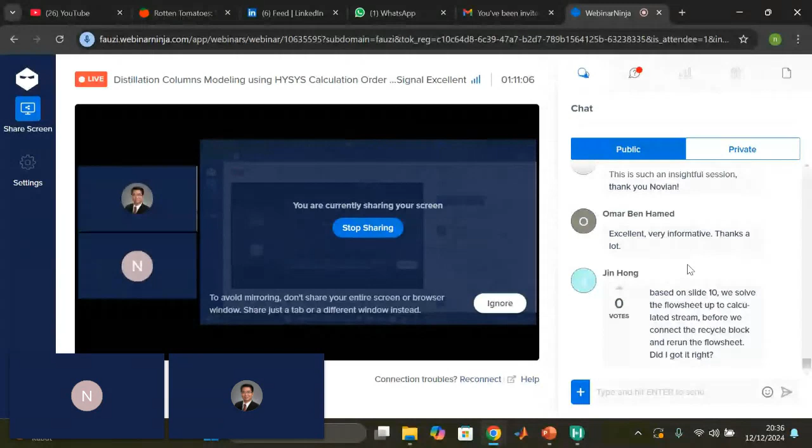All right. Let's give a big thank you to Novian for providing the presentation and demo. This is, I think, a unique way of trying to solve these complex interconnected systems. I think there's one comment from Muhammad Omar, and it's a good comment: another way is using equation oriented, right? Yeah, that is true. Maybe this is a topic for another time. Let me also do some reading and practice.